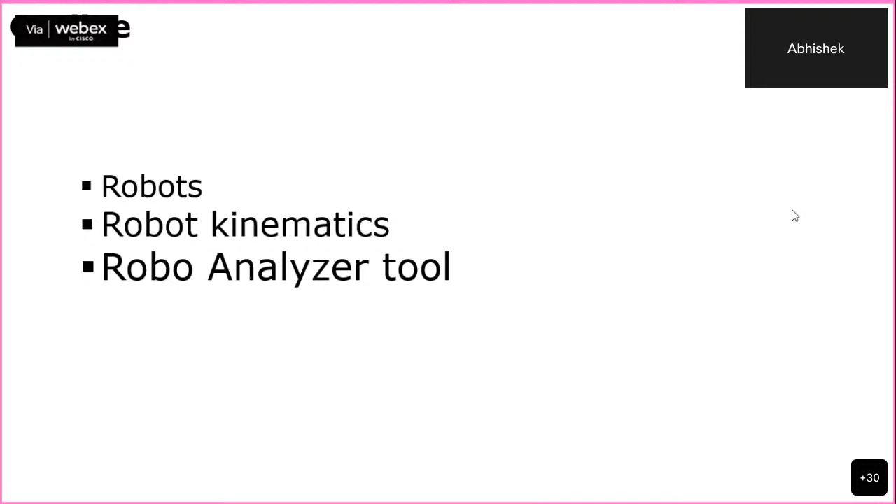I hope you guys can identify this humanoid - this is Sophia. This humanoid robot Sophia has been given the citizenship of Saudi Arabia. So till date, it is the most intelligent robot that exists on our planet, Sophia. So these are the fictional things what we have seen, and in reality we have different sort of machines, different sort of robots.

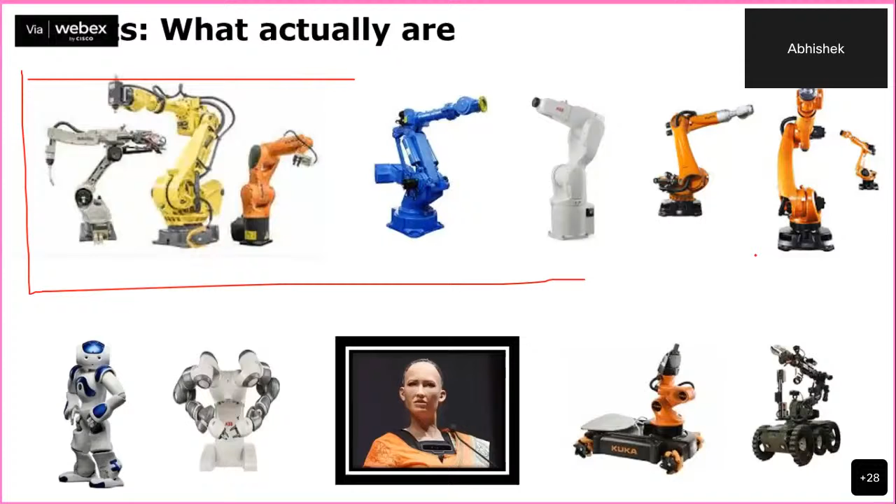So if we try to define robots, what actually robots are, simply we can say it is an intelligent system that interacts with the physical environment through sensors and effectors. Nowadays there is a lot of buzz around the word intelligence, artificial intelligence, so you can use this kind of definition - intelligent system. Whenever we say intelligent system, it should have some sense of intelligence in it, but that's a different context. In general, we can take the robot as an intelligent system that interacts with the physical environment through effectors and sensors.

There will be certain end effectors - like here we can fix a tool, and for this humanoid robot, his hands are the end effectors. Here in the mobile robot, we again have a manipulator and a gripper as the end effector. These systems are equipped with a variety of sensors. Through sensors, these systems get information about the environment, and these sensors are also necessary to get the internal state details of these robots or devices.

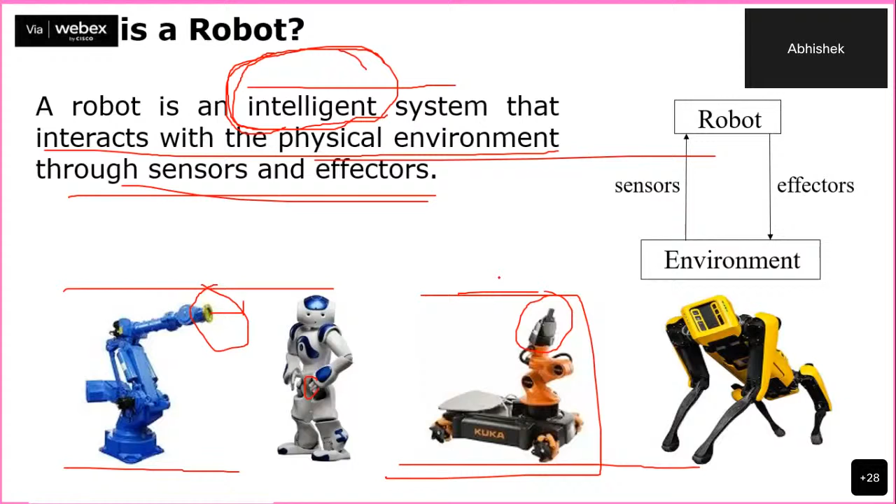Formally, if we look at the definition of robot, there are so many organizations like British Association, Japanese associations, ISO, Robotics Institute of America - all these associations define robots as per their applicable norms. But if you compare those definitions, you'll find two common keywords in all of them: reprogrammability and multifunctionality. What we mean by reprogrammability is that we can reprogram the robot and achieve multifunctional tasks from it. So robots are reprogrammable as well as multifunctional - these are the two keywords that define a robot.

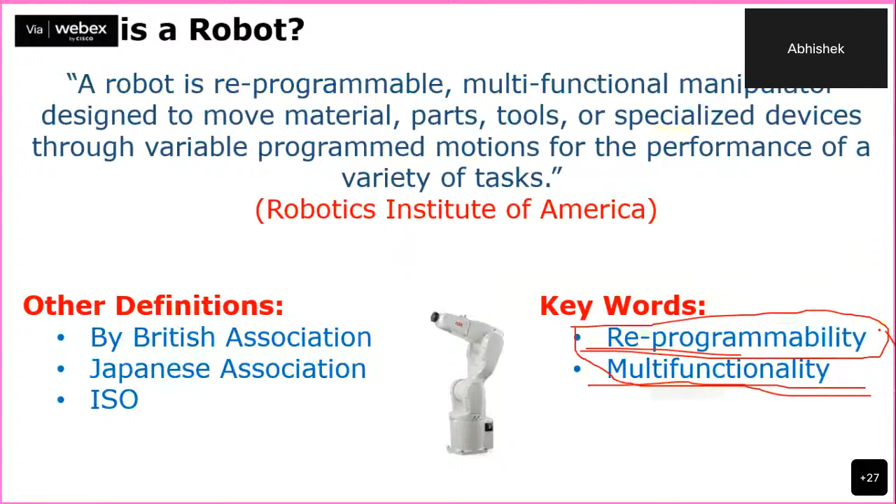If we go for the classification, then in general we can categorize robots into two categories. First one is the industrial robot, and second one is the field and service robots. Whenever we go for industrial robots, they can be further subdivided into two categories: fixed base robot and mobile robot. This is the most general classification.

When we talk about field and service robots, which are used other than industry, like humanoids, like in medical field, so all these robots which are non-industrial robots fall into the category of field and service robots. They are further categorized based on the application. So this is the most general outline or classification of robots, industrial and field and service robots.

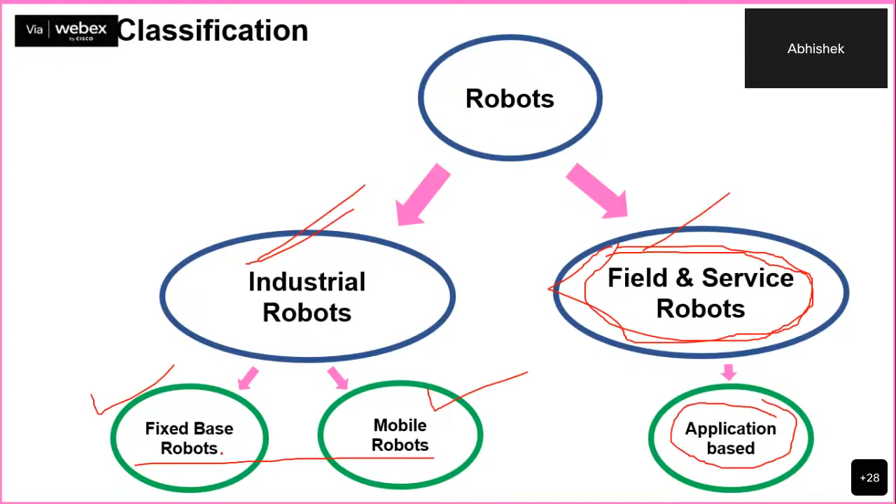Remember that in industrial robots there are two categories: fixed base as well as mobile robots. If we talk about fixed base robots, mostly they are manipulator arms. We call these kind of robots manipulator arms because its design is inspired by the human arm structure. These robots or machines are capable of manipulating something, with a specific tool at the end, whether a gripper, a welding torch, or whatever tool you attach at the end of this manipulator arm, the robot will perform functions accordingly.

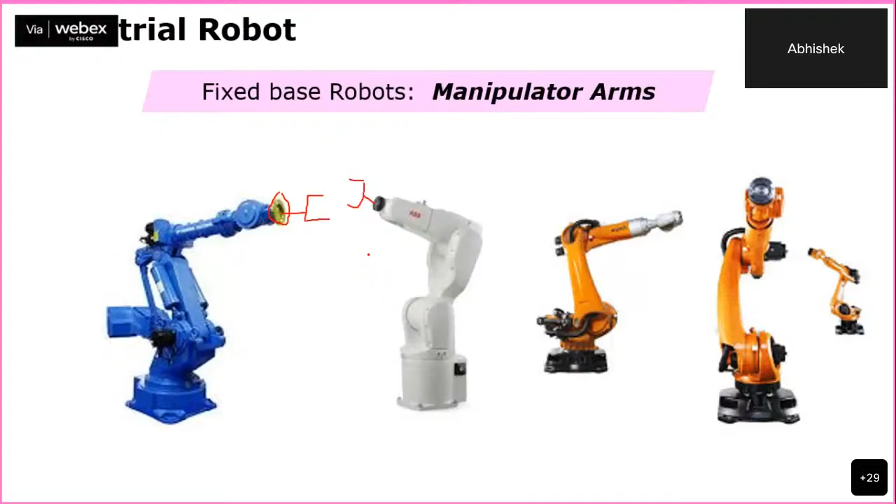Reprogrammability, we have already talked about, we can reprogram the robot. So just by changing the end effector itself, what you can achieve is the multi-functionality.

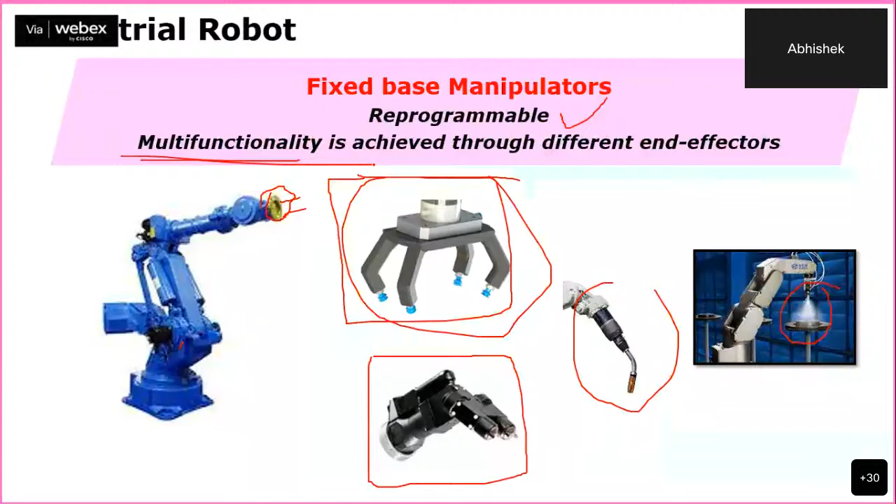Next, the capabilities. Mostly fixed base manipulators have two functions: specific motion of the joints, integrated tooling, and sensors. This is a fixed base manipulator, we have certain joints and links, and this is a fixed structure. So what we can achieve is a certain motion pattern or a specific motion of this manipulator. What is the application of motion, what is the intention of motion, and how we are planning that particular motion, that makes the difference.

Here you can see a car assembly line where giant size robots are making the assembly of the car. If you observe very carefully, the motion of these two robots is very much coordinated, moving in a specific manner trying to finish that particular task. So there is coordinated motion among the robots. This is the role of a robot programmer.

The robot programmer usually generates a robot program based on a certain application. So what your manipulator can do: it can follow a path, it can repeat configuration moves, it can have teleoperation mode of control or target moves. What we can do with the robot is define the motion profile - what kind of motion is required for an application, and how we can govern that particular motion. That is the task of a robot programmer or robotics engineer.

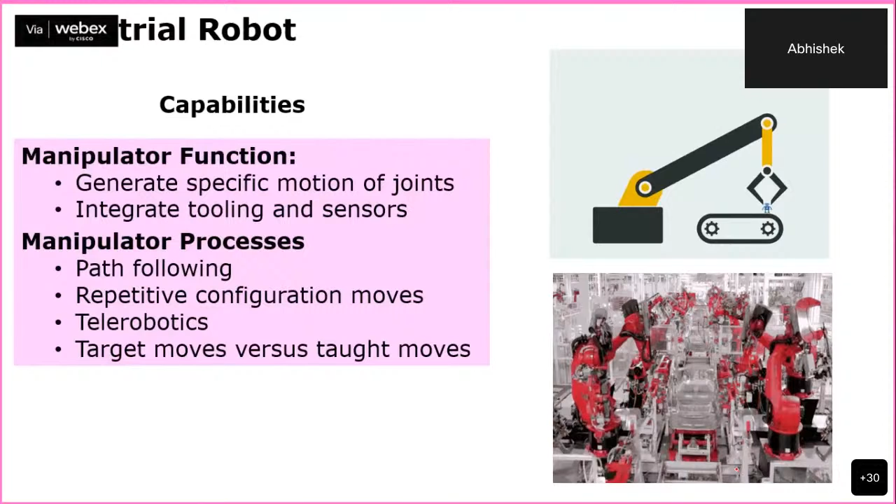Then if we see some major applications: assembly, ultrasonic cutting, welding - these are some of the applications for industrial robots. What is the necessity? Whenever the task to be performed is repetitive in nature, requires high precision, and is dangerous for a human being, then that particular task is suitable for robotization. So repetitive, high precision, and dangerous tasks nowadays are being transferred to robots or manipulators.

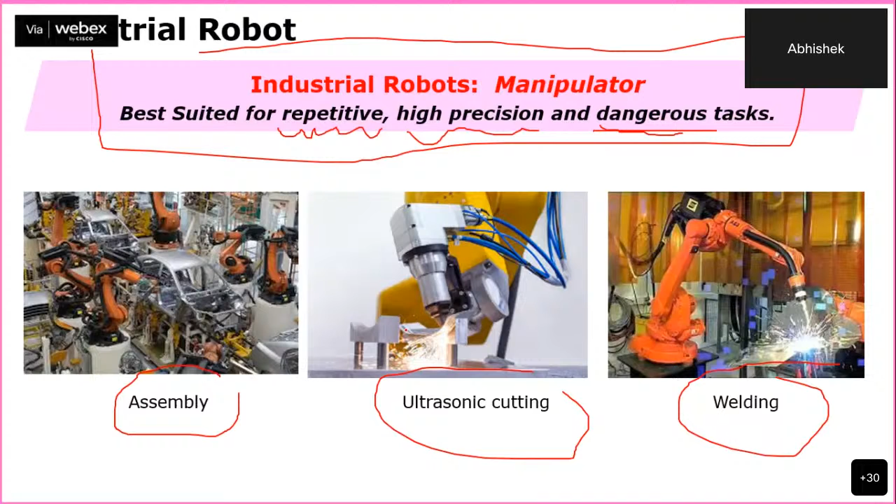Similarly, the other category in industrial robots is mobile robots or AGVs, automated guided vehicles. Since manipulators are the fixed base robots, here we have certain movable robots. Here you can see a mobile robot platform equipped with certain wheels. This is another mobile robot which is being used for palletizing objects. Here also you can see a mobile robot with mecanum wheels.

These kind of robots, mobile robots, are capable of locomotion - they can move from one place to another, and they are very much useful for supporting autonomous operations and autonomous motion. Here you can see another mobile manipulator where a fixed base manipulator is equipped on the mobile robot platform, which gives the movability, the locomotion, to that manipulator.

And here in this small video, you can see a very famous mobile robot named Spot, which is developed by Boston Dynamics.

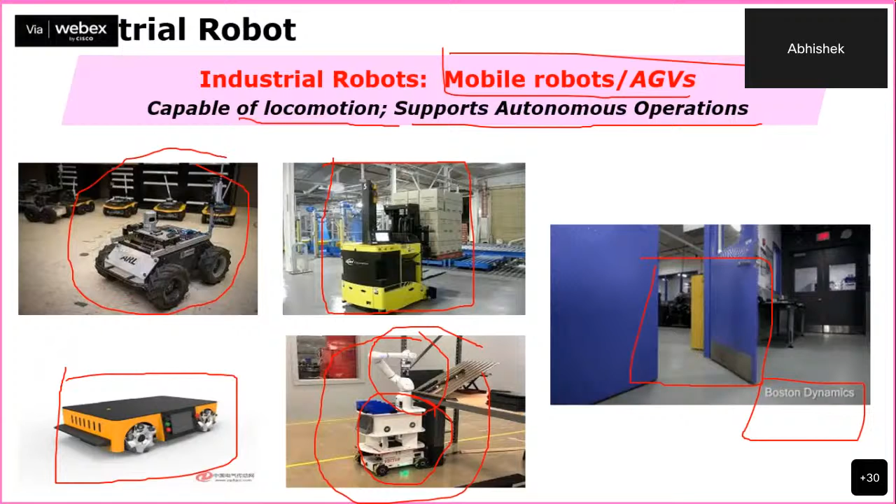So this is nothing but a robot dog, which is capable of performing a variety of inspection tasks. This is the categorization of the industrial robots.

Now, if we go for the modeling part, how we can model the industrial robots or manipulators, we need to refer to the construction of the serial manipulator. If you look at the construction of the serial manipulator, it consists of certain links. Like this is the link, this is the link, and this is the link, and these links are connected by joints.

So this is the skeleton diagram of the robot. Okay, actual robot may be like this. This is the actual robot. But for mathematical modeling, for analysis, whenever we model that robot, we'll model it like this. So this is the model. We'll have certain links, we'll have certain joints, we'll have an end effector at the end.

Since these links are connected serially through joints, these fixed base manipulators are also referred to as serial manipulators. Fixed base manipulators are also treated as serial manipulators.

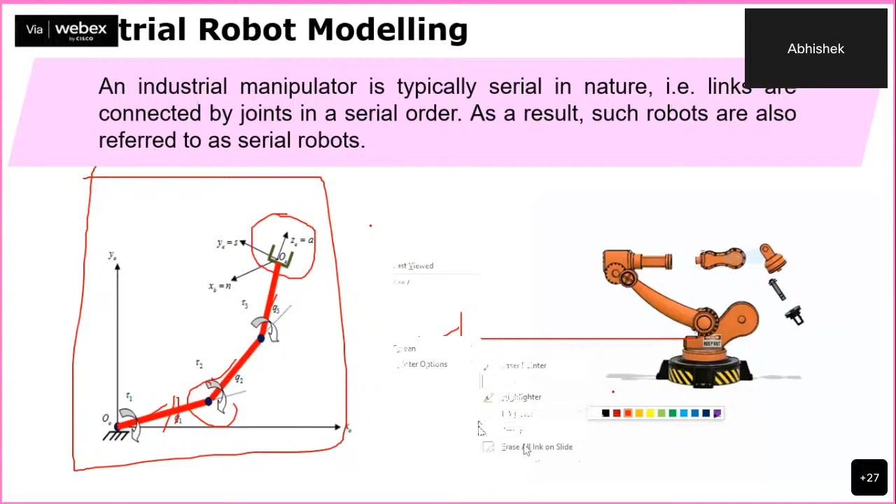Then if we look at the components, as discussed in the previous class, there will be link and joint. So this is an open kinematic chain. You might remember the concepts of 4-bar chain from the kinematics of machines. Following the same categorization, this serial manipulator or fixed base robot usually refers to the open kinematic chain, because one of the ends is free to move. So this is not a closed chain. It is an open chain.

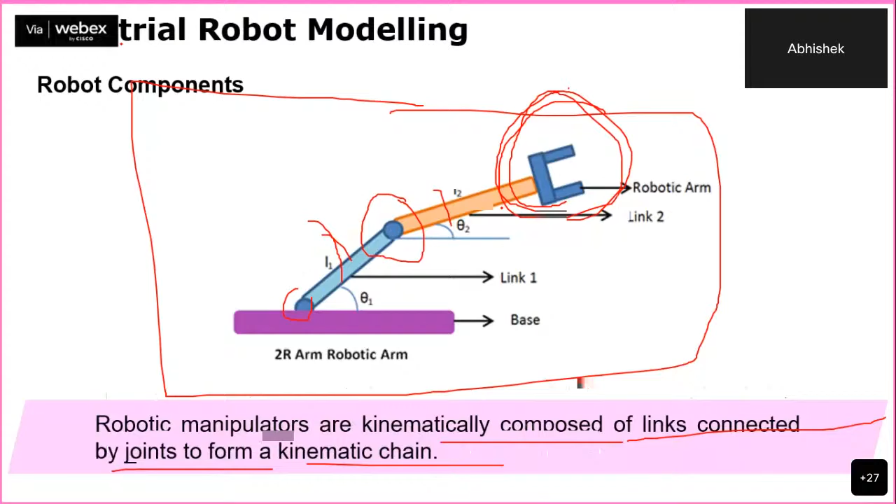The important components are link and joints. Robotic manipulators are kinematically composed of links connected by joints to form a kinematic chain. This combination of link and joint is referred to as the kinematic chain. The most important part when you start with kinematic modeling is understanding how we connect the links. We can connect the links through joints.

So in general, in robotics, there are two types of joints available: first, the revolute joint, and second, the prismatic joint. Another important feature is that these joints have only 1 degree of freedom, so only one motion pattern or motion profile we can expect from such a joint.

So this is a revolute joint. What will be the generated motion? It will generate a rotation about this particular axis. Two links connected together via a revolute joint can rotate about a common axis or axis of joint.

Similarly, if you connect two links via a prismatic joint, what can you expect? You can expect a translatory motion or linear motion along the axis of the joint. So two links connected by a prismatic joint will have a linear relative motion.

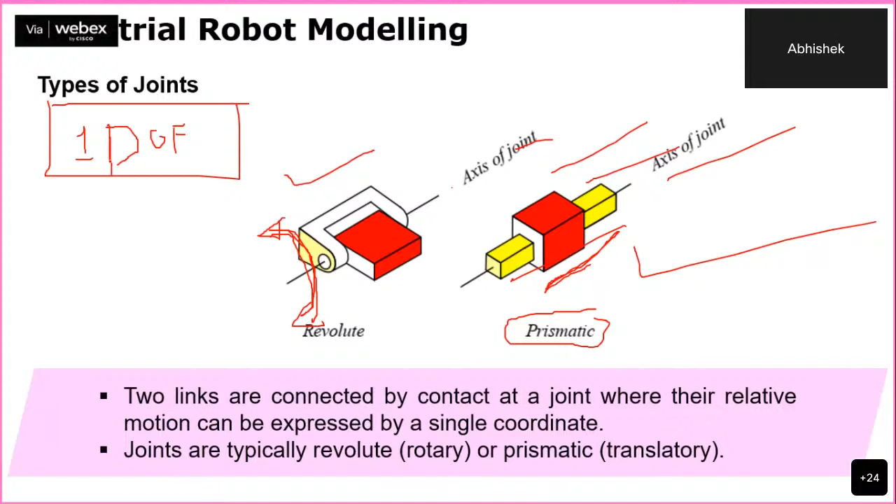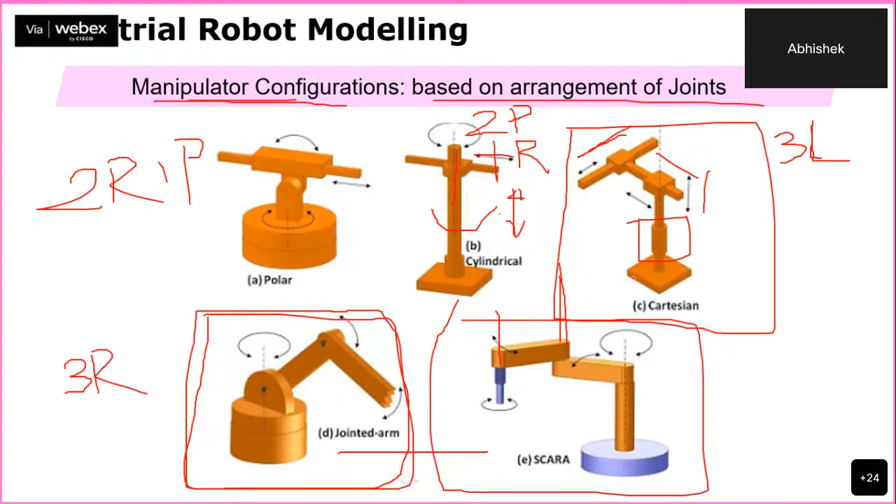This is another configuration called SCARA. This is a special configuration where the joints are arranged parallelly, this joint parallel to that joint, and this joint parallel to that joint. This is very useful in assembly operations.

This is very useful for assembly operation. This is the 3R configuration, articulated configuration, where all the joints are revolute joints. In most of the cases, industrial robots or manipulators fall into this particular category, the articulated configuration.

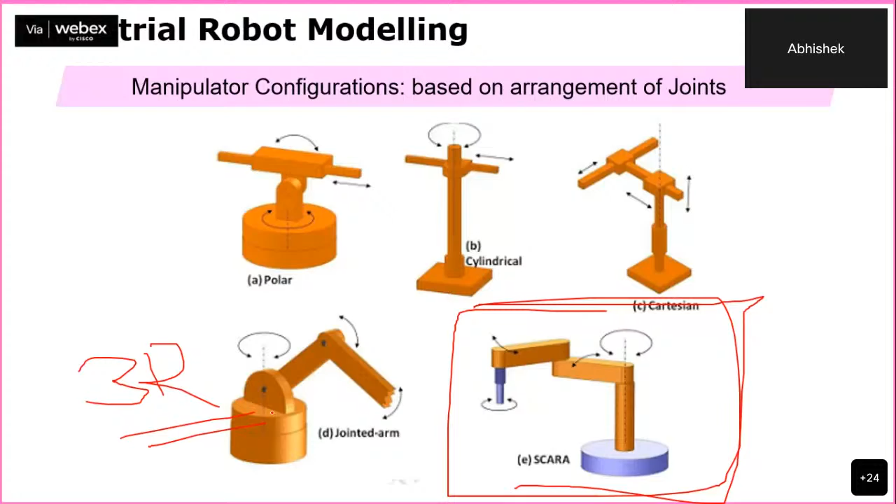Once you are done with the identification of the links and joints, next thing is to go for the kinematic modeling. Whenever we talk about the kinematics part, kinematics basically deals with the motion of bodies without consideration of the forces. This is the definition we have learned at the undergraduate level. Here also, robot kinematics follows the same thing.

But one thing we need to understand for kinematic modeling of the serial manipulator is that there will be a fixed base. This is fixed, this cannot move, and this link, this link, this link, this link, and this link, they can move up to a certain extent based on the types of joint.

But we are interested in the motion of the end effector. Why? Because end effector is the part which is going to perform the necessary task for me. For example, if I have to pick up a glass of water from the table, I will move my hand and ultimately my palm will grasp the glass of water. Similarly here, whatever be the motion profile of these joints or these links, ultimately we are interested in the motion profile or the motion of the end effector.

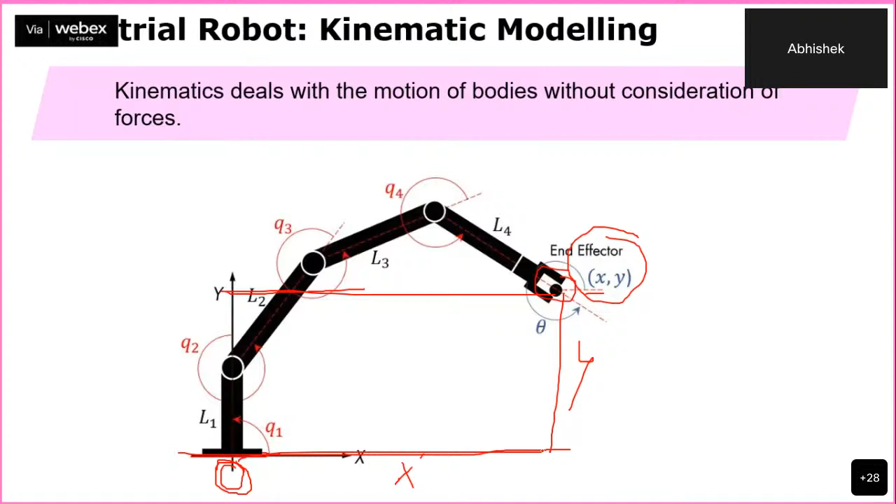Before going to define the kinematic equation or understanding the kinematics further, we need to understand two things. First is the position, the position coordinate your robot has to reach, and second is the orientation. Orientation refers to a particular combination or set of angles to which an object can be grasped or approached for performing a particular task. So what are the different ways of defining position and orientation, which could play a crucial role in robot kinematics, because there are several ways to define these entities.

So usually what is the standard practice? We assign one or more coordinate frames to each link. So this is my fixed frame. Now I will define the next frame over here, next frame over here, next frame over here, like this. And with respect to this, I'll try to analyze the motion of the frame, then there is a frame x1 y1, frame number 1 and frame, all the motion relative to the base frame.

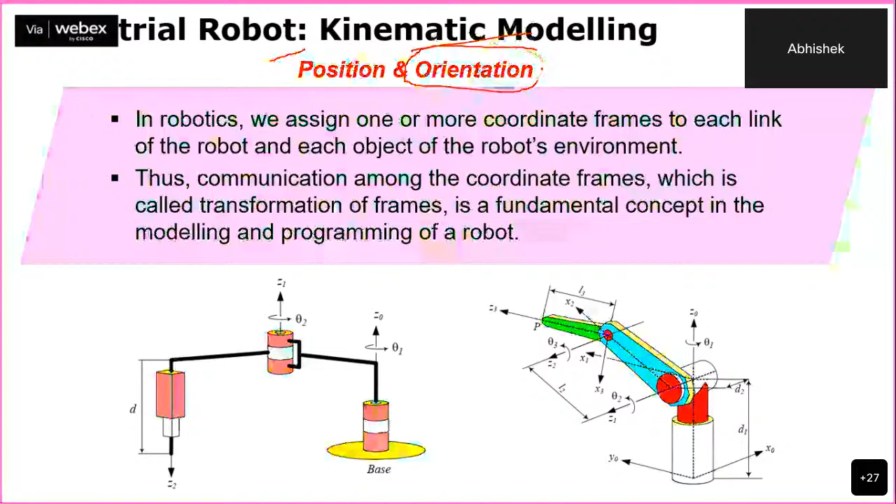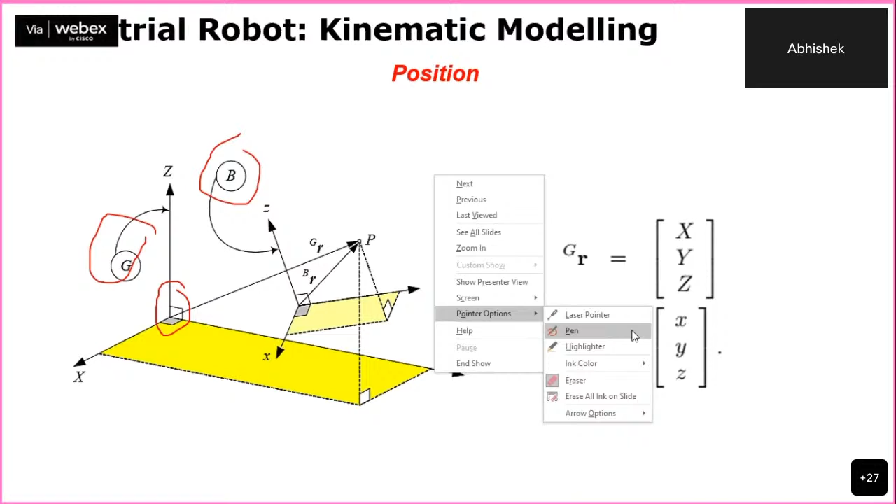Okay, so the same point P can be represented in two different frames in two different ways. When you represent this point P with respect to this origin, the coordinate of that point is written as capital XYZ, when you are representing this particular point P in the ground reference frame with respect to this origin.

Similarly, when you are defining this point locally in the body reference frame, you need to take the origin as this and define this vector. So what will be the coordinates of the same point P in the local reference frame? It will be x, y, and z, the small case letters.

Now there are techniques available to correlate these two frames. That means you can analyze what is the position or movement of this body frame with respect to this ground frame, and in the same manner, the description of point P will change in either frame, that is the ground frame as well as the body frame.

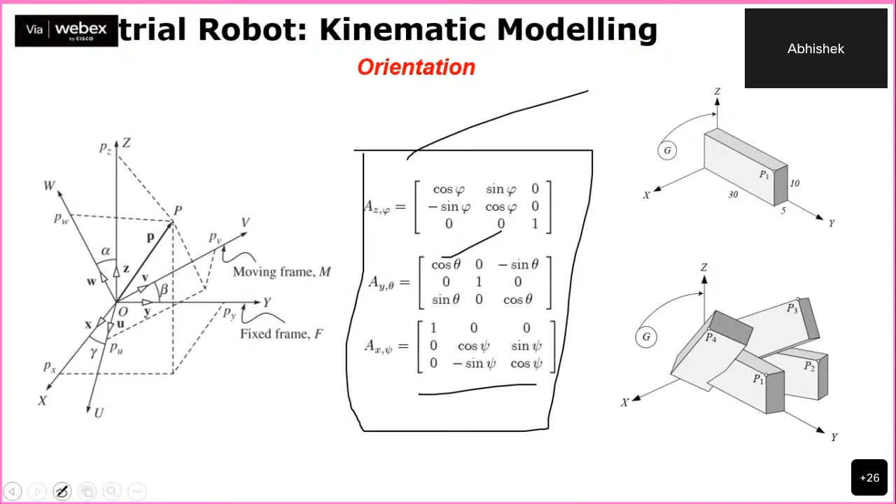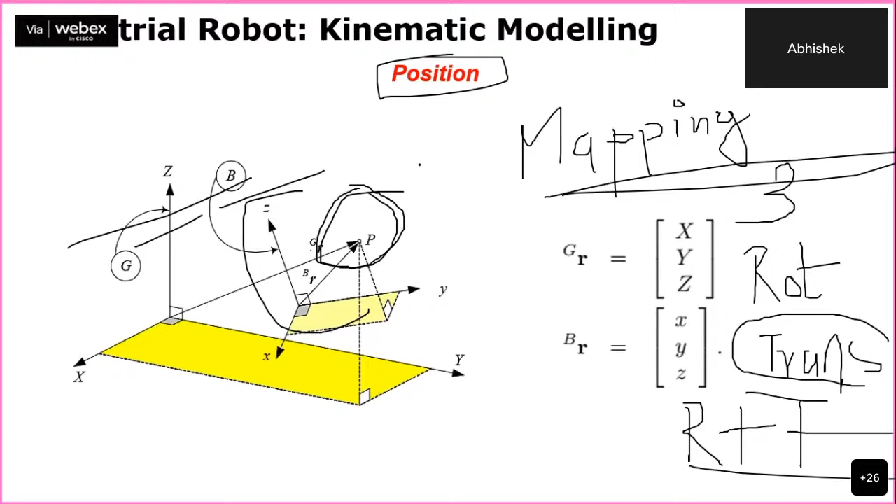So first thing for kinematic modeling is the position and orientation representation. This must be clearly understood. Then comes the problem of kinematics. What are the two cases? There may be forward kinematics and there may be inverse kinematic problem.

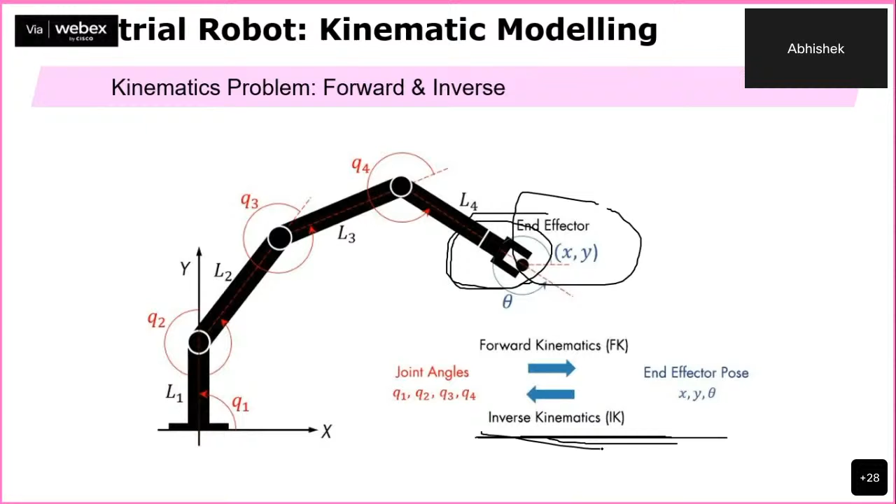So let us see quickly what are the steps for the forward kinematic model, or forward kinematic modeling. Here you will be given a set of joint angles and we'll be estimating the end effector's position and orientation. So this is the straightforward problem statement. Then what are the steps?

First step is to assign the frames, because these coordinate frames cannot be assigned simply. There exists an algorithm or procedure which we need to follow. That algorithm is known as the Denavit-Hartenberg or DH algorithm. We have to use this particular algorithm for frame assignment, because different arrangements of joints, prismatic or revolute, and how they are connected, may result in different configurations. Therefore we have to follow this standard notation, the standard procedure of the Denavit-Hartenberg algorithm, to assign frames to a manipulator.

Afterward, once you have assigned the frames, the next task is to estimate the DH parameters. So what are the DH parameters? There exist 4 parameters: A, alpha, D, and theta. These 4 parameters can be taken as a signature of any robot. If you know these 4 parameters for a robot, you can perform the entire kinematic, dynamic, and all sorts of modeling. So this is the basic requirement. A is referred to as the link length, alpha is the link twist, D is the joint offset, and theta is the joint variable.

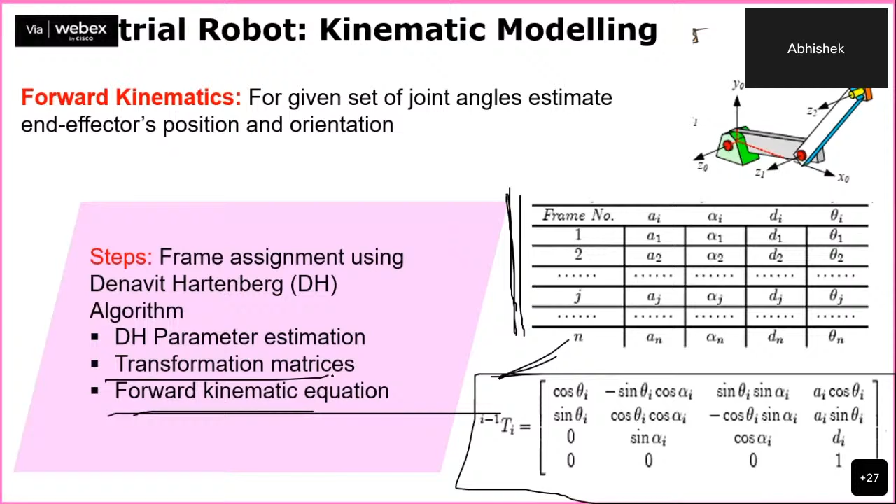0 T1 and 1 T2 are the two matrices that you define, and finally you multiply these two matrices in the order 0 T1 into 1 T2, which gives you 0 T2. That means this point is now represented with respect to this fixed base, so 0 T2 means the position and orientation of frame 2 with respect to frame 0.

Using this expression, we can define the position and orientation of the end effector with respect to fixed base. This is applicable for an n degree of freedom robot also, whether it's 6, 7, 5, or 4 degrees of freedom. You form the transformation matrices for the given robot and multiply them together to form the forward kinematic equation. This is the procedure for forward kinematic modeling.

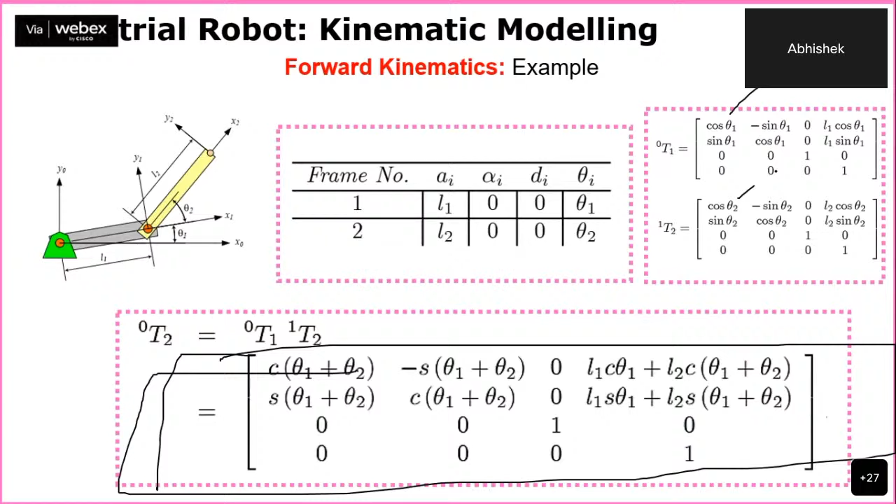Similarly for inverse kinematic modeling, as I told you, it is the most complex part, because we'll be given this particular expression, the position and orientation at a particular instant, and what we need to find is theta 1 and theta 2, or the joint variable values.

So there exist multiple solutions, or there exists no solution. And for solving the inverse kinematic problem, we have to deal with non-linear algebraic equations, which may be very difficult to solve at times.

Therefore, only for a limited set of robots does a closed form or analytical solution exist. For the rest of the cases, what option do we have? We have to go with iterative methods. So this is just a primary intro about inverse kinematics.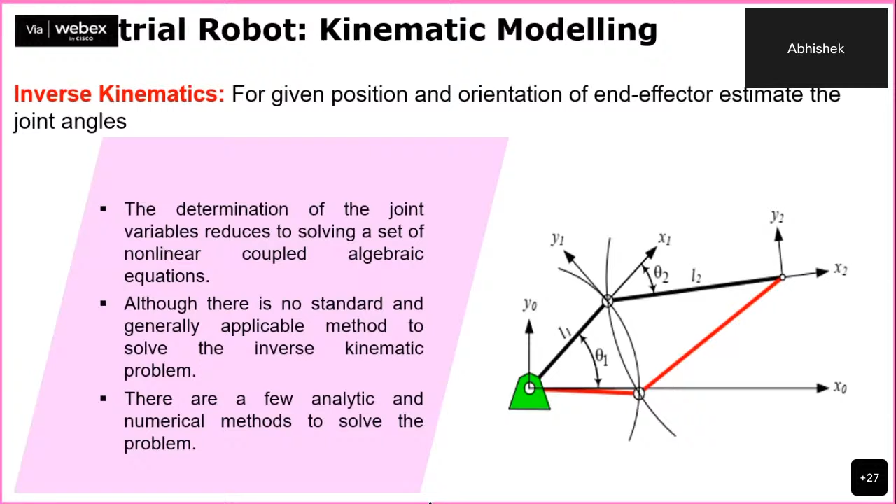This is the problem statement we have: this position and orientation information at a particular instant is given to us. What is the first step? Again, to follow forward kinematics and compute this particular expression. This is given, and this will again be computed to solve the inverse kinematics.

So again you need to get the transformation matrices and forward kinematic equation like this, and then you can compare these two expressions - compare this 0 T3 with the given set of matrices. After doing a lot of mathematics, equation solving, you can come up with the values of theta 1, theta 2, and theta 3.

So here you can see that for this particular example, theta 3 is not uniquely defined. We are getting the value of theta 2 in combination, that is theta 2 plus theta 3. We need to solve this particular equation to get theta 3. So there exists complexity in the inverse kinematic solution that you need to analyze very carefully.

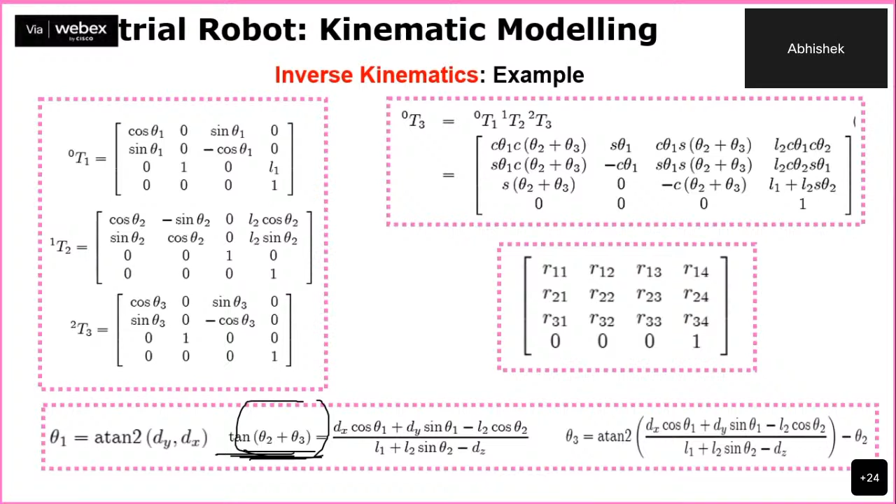So this is all about the forward and inverse kinematic part. At the end, I would like to give you a brief introduction to the Robo Analyzer tool. In order to learn these fundamental concepts - the DH parameter, the forward kinematic modeling, frame assignment, mapping - you can utilize a free software tool called Robo Analyzer.

This is a 3D model based software that can be used to learn robotics concepts. Whatever we discussed in this lecture, you can easily visualize in the software Robo Analyzer. It is developed by IIT Delhi and is freely available for educational use.

Every student can download this particular software and utilize it to learn robotics concepts. One best part is that you need not install it - you can simply download the zip file, and there will be one executable file you can use to learn. I'll just show you.

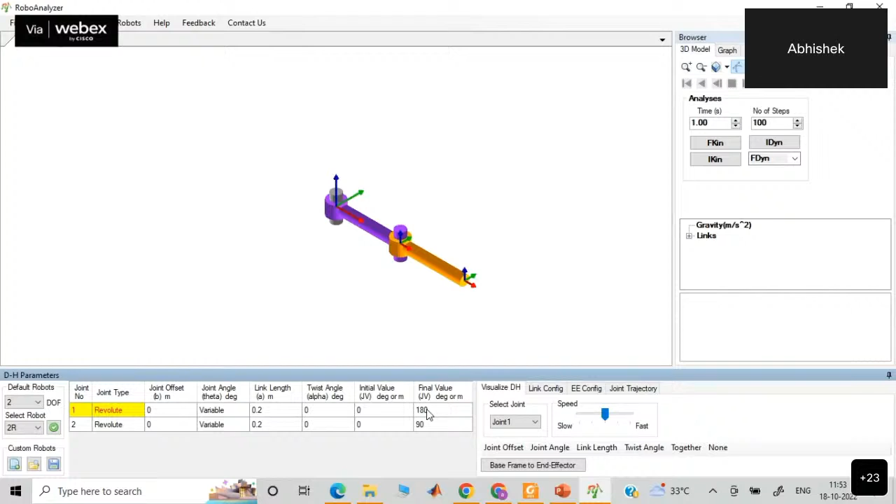So this is just a representation in Robo Analyzer. This is a 2 degree of freedom robot. We can see the 2 revolute joints, and here is the table of DH parameters. We can perform the forward kinematic analysis and see the motion and what changes are happening in the matrices, in the trajectories. Everything we can track. So this is the end effector configuration you can see at the bottom.

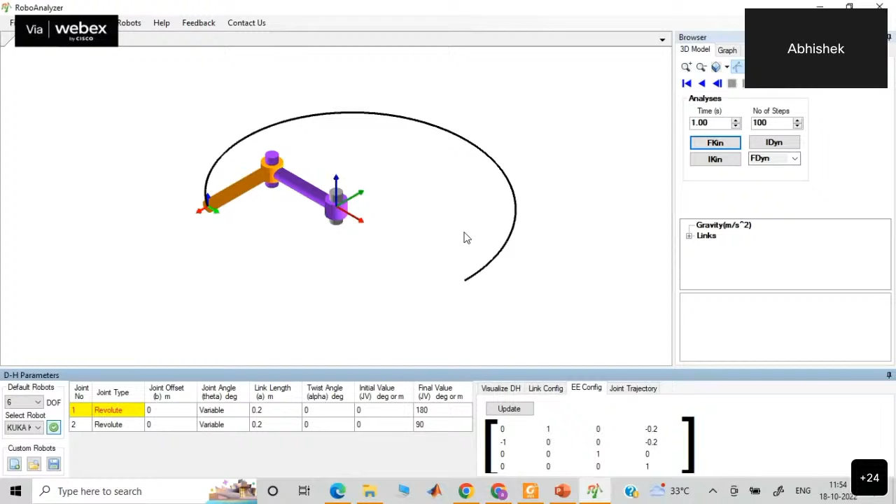A variety of robots from 1 degree of freedom up to 7 degree of freedom are available here, as well as some real industrial robots are available, like here the KUKA KR6 robot. So whatever fundamental concepts are required, like frame assignment, how the transformation matrix works, or how the position and orientation are computed for an industrial robot, that can be easily visualized through this particular software. So I request all the students to please use this software tool so that you can understand the concepts better.